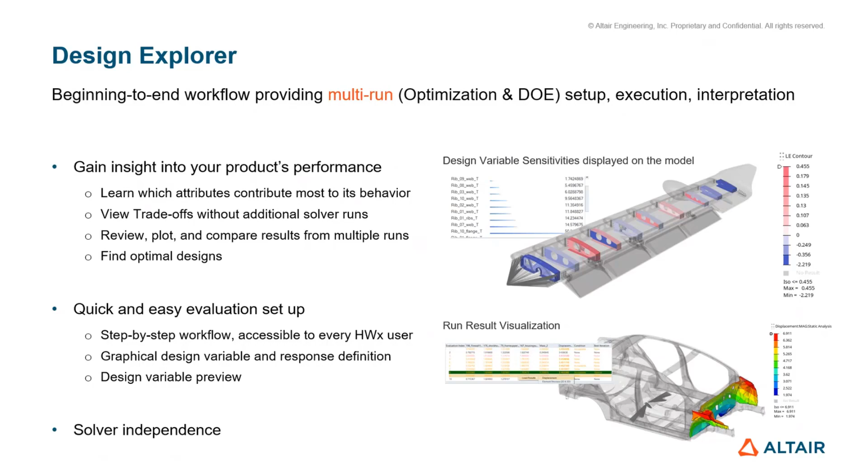So a quick word on explorations before we go into looking at the tools and a demonstration. The Design Explorer provides the ability to perform a couple different types of explorations: optimizations and designs of experiment. Often when people think about exploring or optimizing, they go right to optimization. And optimization is great—it provides an optimal answer to a specific question. For example, what is the lightest design that I can achieve while ensuring that certain criteria are met, like keeping stress less than a certain value or keeping a certain displacement within a range. The Design Explorer certainly can help you set up optimizations and answer these kinds of questions.

And this can be very, very useful. The benefit is we can arrive at these optimal answers, but it is dependent on the type of question that you ask—what are your loads and inputs, and how have you framed the question to receive an optimal answer.

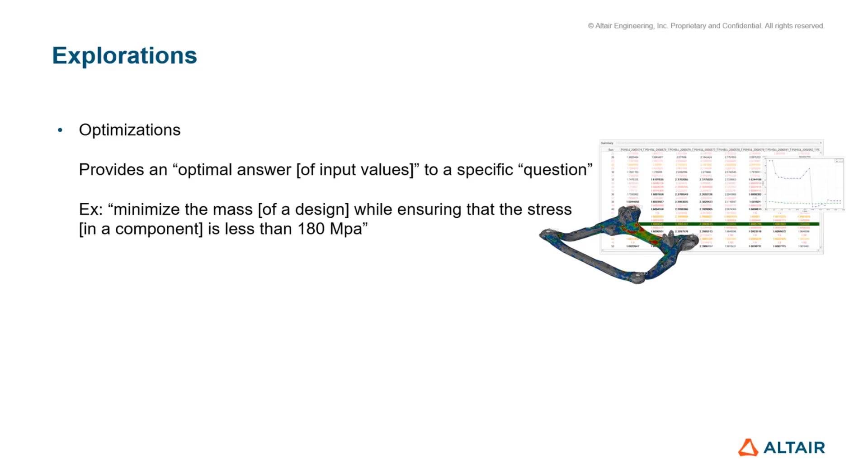Alongside of optimizations, we can also run designs of experiments. This is where we systematically vary the input values of our simulation over a series of runs and evaluate the corresponding responses or output values to these changing inputs. We can gain a lot of additional insights by running a design of experiments, and I'll show that in a demonstration.

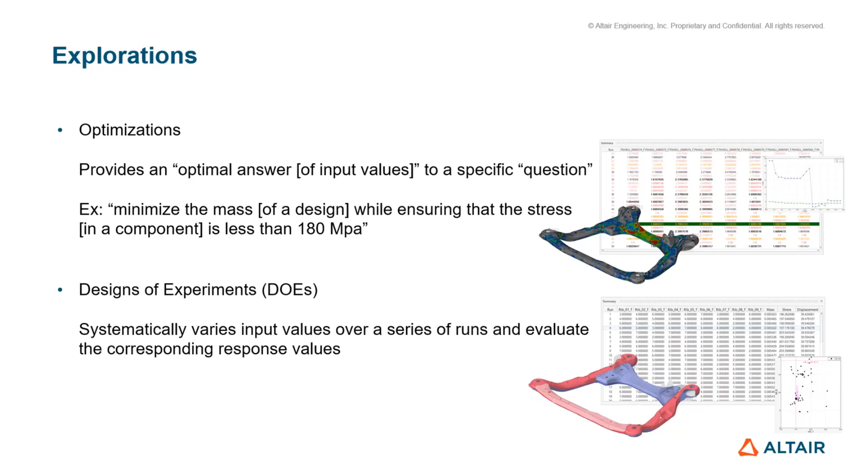So let's take a look at what the Design Explorer looks like. Before I go into a demonstration, I want to give you just a high-level overview because I won't be able to touch on everything in the demonstration, but I want to kind of set the stage here.

So what you're looking at is the latest HyperWorks interface, and across the top is what we call a ribbon, which is where we host various workflows inside of HyperWorks. What you're looking at is the Design Explorer ribbon. Very quickly, I want to show you how it's divided into different areas.

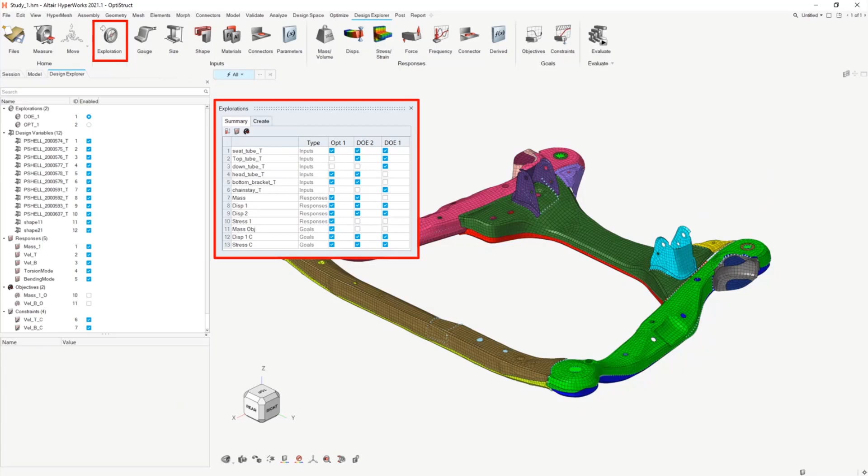First, we have an exploration tool, which is where you will create and manage all of your explorations. You can have any number of explorations within a given HyperWorks session, so any number of DOEs and optimizations. The next set of tools are what we call inputs or design variables, and this is where you define the things within your model that can change over the course of a multi-run simulation—things like part thicknesses, materials, material properties, and so on.

Next, responses and goals. These are the outputs, things that you might want to measure within your explorations, like mass or volume, displacement, stress or strain, forces, frequencies, and other measurables that you want to track throughout your exploration.

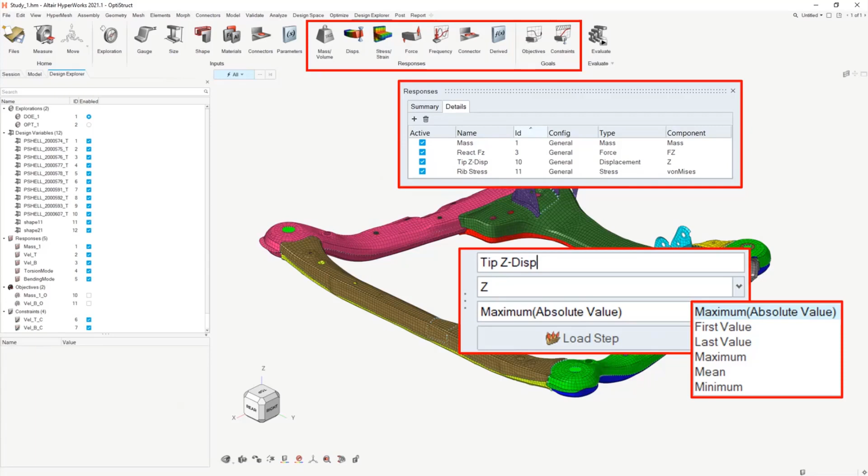And then you may have some goals on top of that. You may have an objective, for example minimize mass, or some constraints like we previously showed, keep your stress less than a certain amount, or a displacement over a certain value. And then the final tool is the evaluate tool.

This is where there's just one button, but there's a lot of things embedded behind this tool. This is where you'll do your submission, and we can automatically submit and monitor all the jobs in your exploration as it's running, so you can see if it's going smoothly, or if there have been issues you can interrogate those.

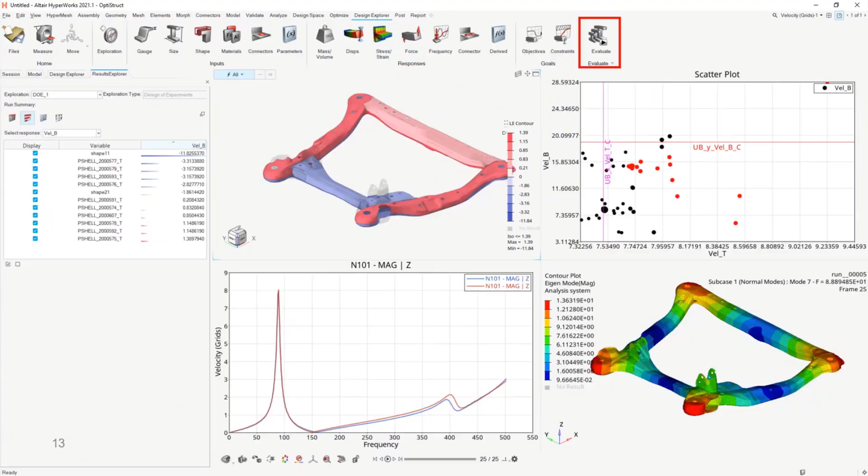So let's dive in and look at a specific example. This is just one example, but the tool is very agnostic to what type of model or domain you're doing. This is an automotive example, but the Design Explorer is domain agnostic - automotive, aero, architectural, and so on.

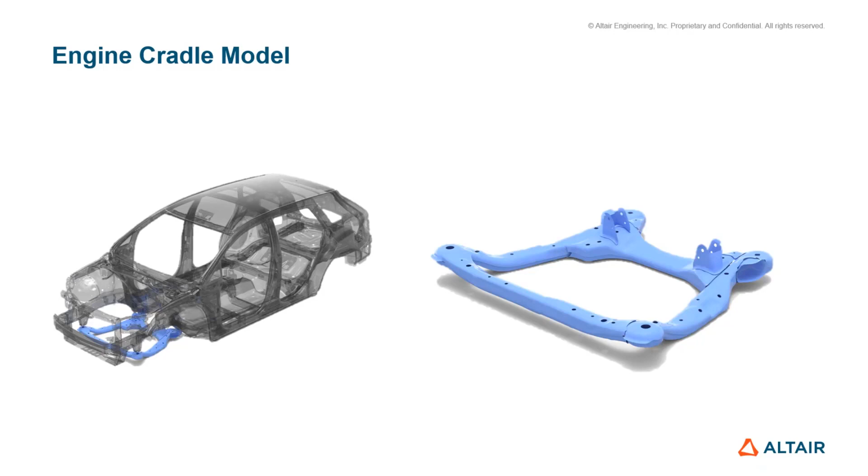In this example, I just want to give a brief description. It's an engine cradle model, an open source public automobile model. The blue part there is the engine cradle, and that's what we're going to be using for this example.

In this example, we've applied some basic dynamic loading to the model, and we've observed a couple different modal frequency peaks, one for a torsion load at about 89 hertz, and similarly a bending mode at about 400 hertz.

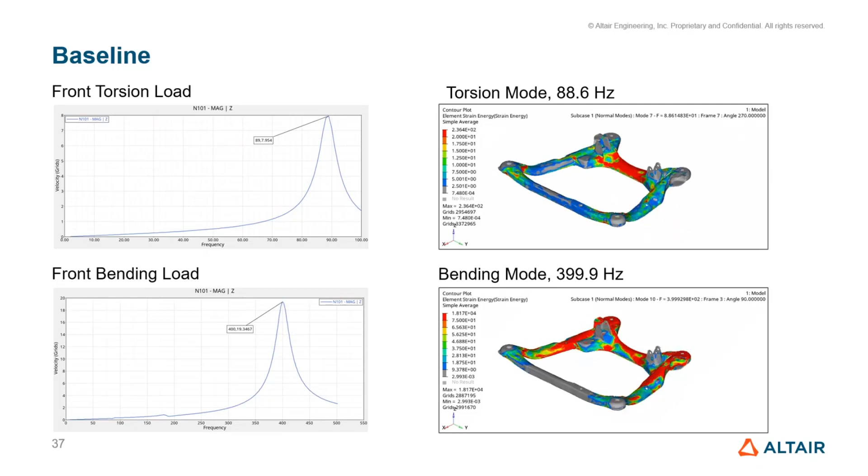So we've set up a problem here where we'd like to explore this design a bit more and learn what parts are contributing to those different modes, how we may modify them, or how we may optimize this design under certain criteria. So we're going to set up a design space as shown here.

In this case we have 12 design variables. 10 are gauge or thickness variables for this part, and then we've defined a couple shape variables, one of which you see animating on the screen.

And then we've identified 5 responses or outputs of interest: the mass of the cradle, and then the velocities and their corresponding modes.

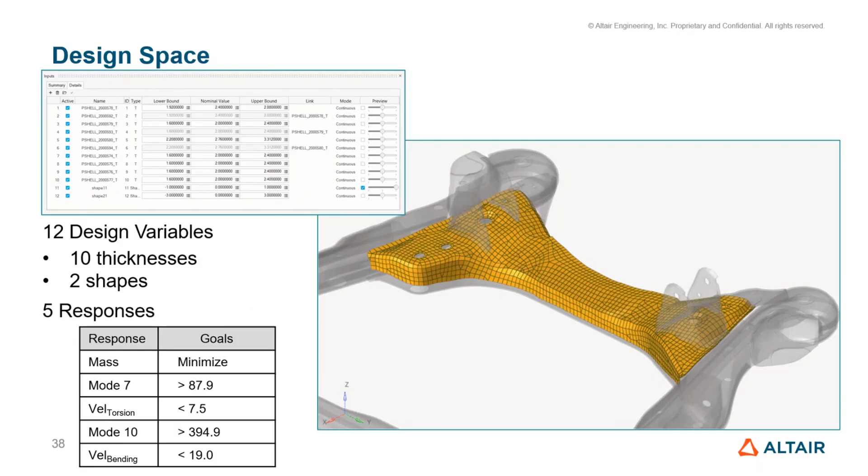So now I want to jump in and demonstrate how I would set up a problem like the one we just described, how you would use Design Explorer to quickly and easily set up the design space, evaluate the design of experiments or optimization, and then interpret and evaluate the results.

So you can see here I've got the model open on the screen. I'm going to click on the Design Explorer menu option and open the ribbon that you just saw previously. The first thing I'm going to do, I'm going to step through left to right and walk through some of these different features and show you how they work, how you would interact with them, and hopefully how intuitive and natural they are to use for a HyperWorks user.

So the first thing I'll do is click on this little compass icon, and we're going to open the Design Explorer browser. This is just where we can see step by step what's going on, what's being created at any given time, what items or entities we're working on, and track what's going on. But we're not going to have to interact with this browser too directly.

As I mentioned, mostly everything that we do, we're going to work right in the graphics area, in the context of the model itself, and that's what I feel makes this workflow very intuitive and natural, and that's true of HyperWorks in general now. So the first thing we'll do is click on the plus icon here, and we'll create our exploration.

As I mentioned, you can create any number of explorations. We're going to just create one DOE to begin with. We're going to give it a name, name our study, and we'll just call it Demo Study. And we'll choose a folder location to store this information in.

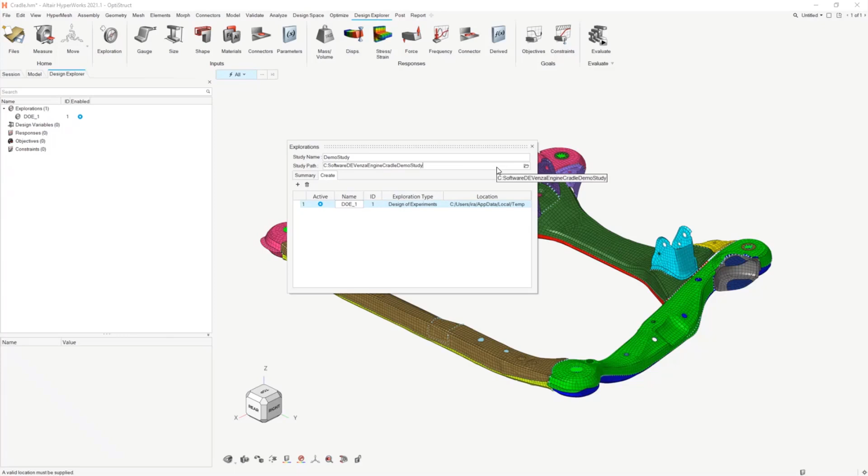I'm just going to paste in a folder location that I previously copied for this demonstration. And we can rename our DOE, or we can accept the default, DOE1.

Okay, now we're going to create our design variables. The first thing I'll do is change my view to isolate my design space. I had previously saved this view with all the parts of interest in this assembly, which are the main parts of the engine cradle.

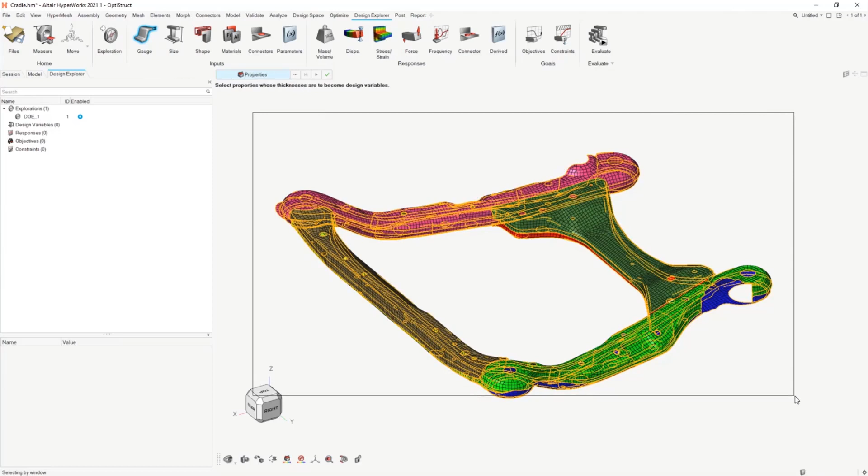I'll click on Gauge, where I'll define my thickness variables. A guide bar prompts me to select properties whose thicknesses or gauges I want used as design variables. The easiest way is to drag a window across the screen and select all 10 of the components currently displayed, then just click Create to generate the 10 design variables.

Before I do that, let me briefly describe what's going on, since there are different ways to define these variables. Whenever we define a design variable, it has a nominal or baseline value, simply read off the baseline model as it exists here.

Then I need to tell the Design Explorer how this value can vary over the course of an exploration—in other words, a lower bound and upper bound, or minimum and maximum value. By default, it creates that lower and upper bound as plus or minus 10% of the nominal value.

If I click Create again, it creates all those for me. I can change these values to plus or minus 20% if I want. I also have different ways of defining these variables: as a percentage like I'm doing, by setting specific values for the lower and upper bounds, or even by setting discrete values—for example, if each part can only be made from a blank of fixed values, I can enter those as discrete values in a table.

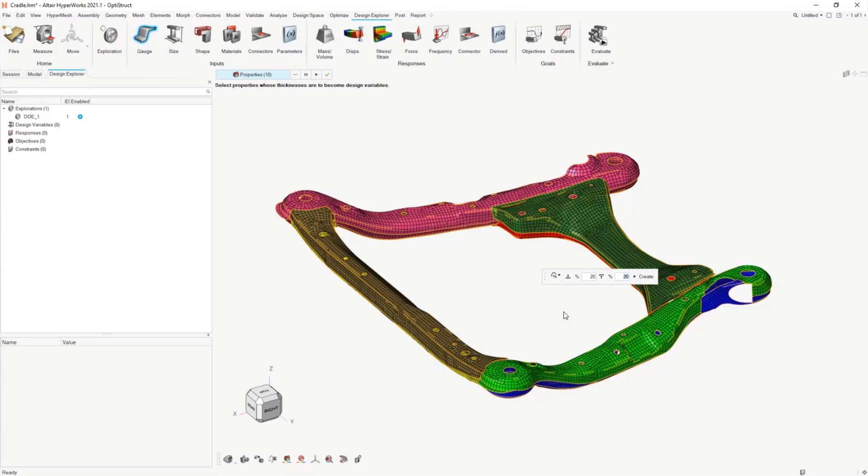In this case, I'm just going to change it to 20% and click Create. With just a couple of clicks, I've got 10 design variables created now.

In the example I mentioned, we had a couple of shape variables. We had previously used the HyperMesh morphing tools to create shapes within the model, and we can define those as design variables as well.

I can pick those graphically—they're not turned on at the moment. If I turn those on, I can pick them graphically just like the thicknesses, or click on this advanced selection dialog and choose the two shapes in the model, then click OK. Now you can see I've got two shape variables created.

So that defines the 12 design variables I mentioned. We can click on any of these review dialogs and see a couple things: a summary panel showing our DOE and all the variables used in it, or we can click on Details to see details of the design variables themselves.

So I can see each of the variables, the thickness and shape variables, at the bottom, along with their nominal value, lower and upper bound, and we can modify these as needed. There are also some preview tools here that I won't show in the interest of time, but you can check on any of these.

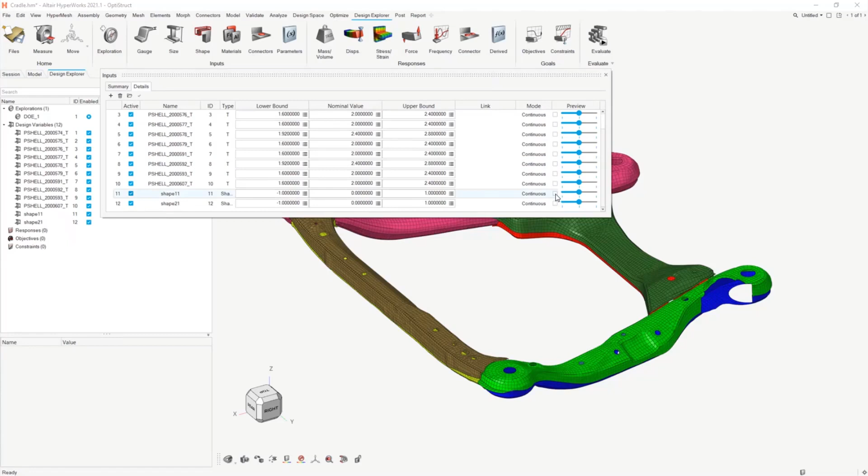For example, the shape variable—you can animate to see a preview of the shape and its lower and upper bounds. Okay, so the next step is, we've defined all our design variables.

Let's define our responses. I'll turn back on the entire model so I can make the selections I need to make. Our responses, you recall, are here in the next portion of the panel.

The response we're interested in, in this case, is a mass response. So we'll click on the mass tool, then click play or apply, and you can see a mass response is created. That's really all I have to do.

After creating the mass response, I want to create my velocity responses as described in the slides. I'll click on the displacement tool here, which has all my nodal type responses, then in the guide bar choose velocity. Again, the guide bar prompts me for what it's asking, so it should all be very intuitive and graphics driven.

It's prompting me to select the node or nodes where I want to extract this velocity. We'll go ahead and select one node here, which is the point of interest, and now I get this micro dialog.

Similar to creating the design variables, this is for capturing additional contextual information to the type of response that I'm creating. I can choose which load step I want to extract it from. There's some additional information if I pull down on the chevron here, but what I'm going to do is open this post entity editor where I can see all the attributes.

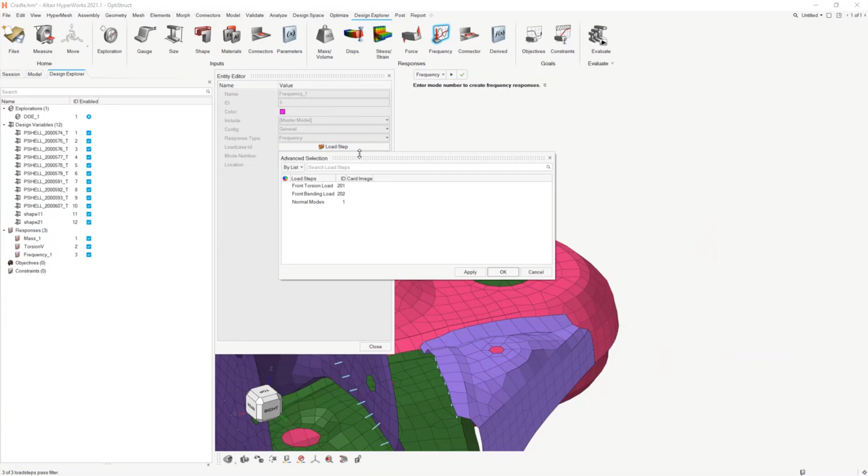I can create a corresponding frequency response because I'm interested in tracking the mode associated with that velocity. So I click on frequency, then click on play here, and in its micro dialog, very similarly, I can select which load step to use to track this mode. In this case, there's a normal mode step, and I'm interested in tracking the seventh mode. So I've created this frequency, and maybe I'll rename that as torsion.

So I can continue on this process, defining additional responses. In this case, we also had a velocity response as well as a modal response for a bending mode. Those will be created in much the same way.

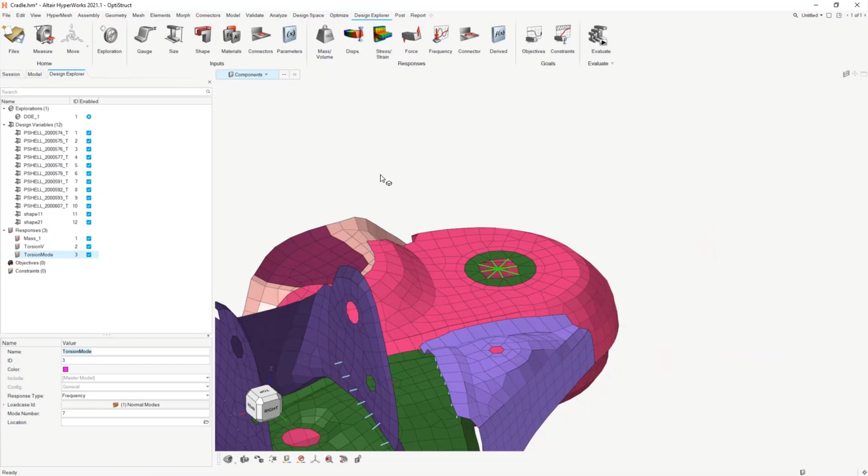Next, if I have any objectives or goals for my simulation or exploration, I can define those here. I'll just show quickly how to, this is a design of experiments so it wouldn't necessarily have an objective, but I may choose to run an optimization later. So I can create an objective where I simply pick a response like the mass, then select the type of objective. In this case, I want to minimize the mass, so we'll leave that as it is.

Constraints are defined in much the same way. For example, I think our baseline torsion velocity was around 89 or 90 hertz. So let's say I want to take that torsion velocity and constrain it to be no lower than its baseline value, which was 89 hertz, I believe. So now I've got an objective and one constraint.

I can continue to build this up similarly for the bending mode as well. So once I have my exploration, in this case my design of experiments, defined, I would go and use the evaluation tool here to go ahead and evaluate this design of experiments.

The evaluate dialog appears and gives me some options in terms of the DOE type I want to run, the number of runs I want to use, if I want to run more than one job in parallel, and so on. The optimize button here is checked by default because I do have an objective. If I leave this checked, once I run my design of experiments, it will try to optimize based on that DOE's response surface. I can turn that off if I just want to run a design of experiments.

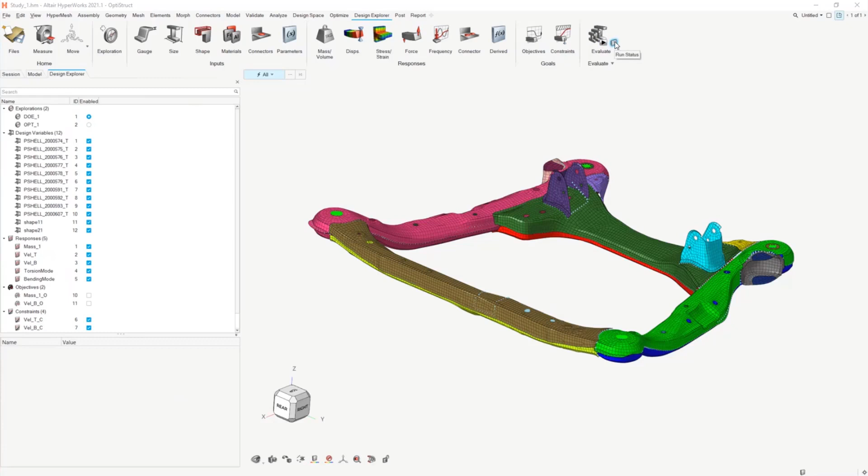And I evaluated this DOE. We can see on this run status dialog the runs that had previously been done for this DOE. In this case, it was a 73 run design of experiments, and we can see all the runs completed successfully. So once that's done, I'm going to go ahead and open the Results Explorer.

As I mentioned previously but didn't show in detail, the Results Explorer contains this browser with all of the tools and reports that can be used to interpret and post-process an exploration like this one. Let me go through and describe the different tools available for interpreting the results of a design of experiments like this.

Across the top here there are 4 buttons: run summary, linear effects, trade-off, and scatter plot. These are available for all designs of experiments. Let me go through and show how these might look and work.

We have a summary table, which is what's displayed here. In this table you can see one row for each run, corresponding to the 73 runs in this DOE. Each of the columns shows the inputs or design variables, all my thicknesses and shape variables, and then the corresponding response values for each run: mass, the 2 velocities, and the modes we were tracking.

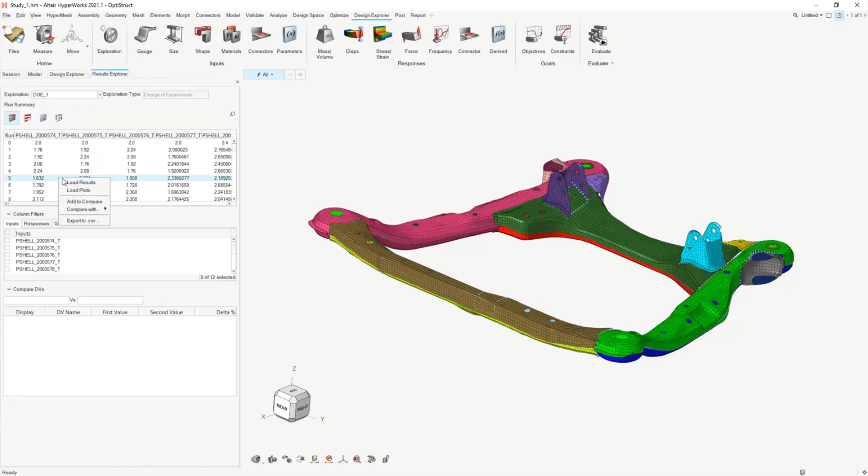I can view all the results in a tabular form. We can also load results directly from here. So for any run of interest, maybe run 5, let's load results. When I click load results, you can see the results are loaded into a separate window here within HyperWorks, and now I have full control of the post-processing client. I can switch to that.

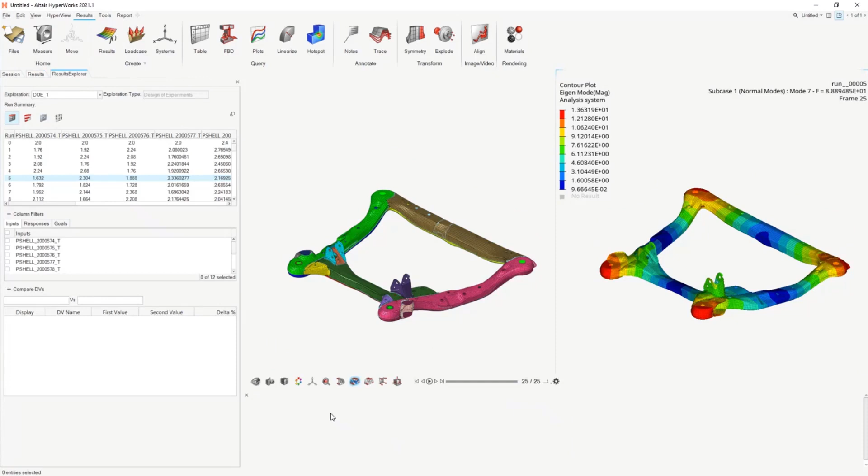Let's say mode 7 was my torsion mode of interest. We can switch to that mode. We can come down here, for example, and change — maybe we want to look at the strain energies. Let's apply that. And then maybe we want to look at the animation of that mode for the fifth run. So we can do that.

We can continue to build up a dashboard if we like. I can change the layout here to maybe a 2x2 window situation. Maybe in the lower right-hand one I want to load results for, maybe compare run 5 to my baseline run. So I can select the lower right window, and we can look at the 7th mode. We can animate these side by side to compare them and do an interrogation that way.

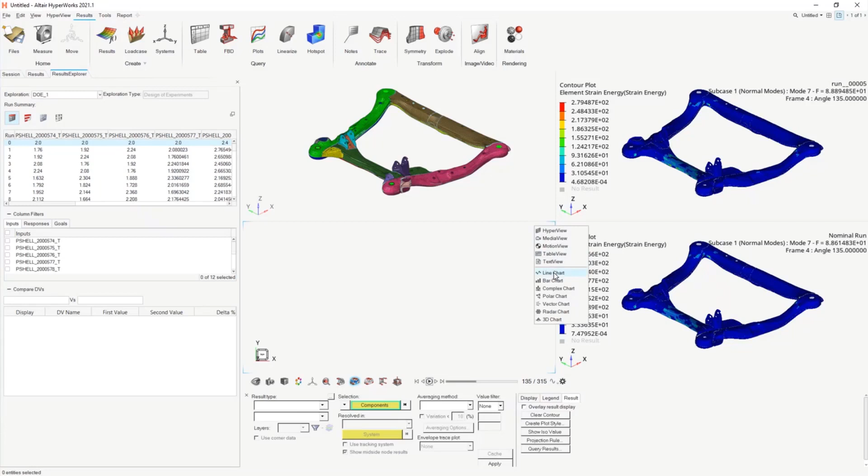Additional tools from this summary table — we can also load plots. If I change this client to a plotting client, maybe for those same runs, the baseline nominal run and run 5, I want to load and look at the velocity peak for this load case. So I can select load plots, get the create curves window, and maybe look at the vertical magnitude for the torsion load case and see where that peak is that I was interested in.

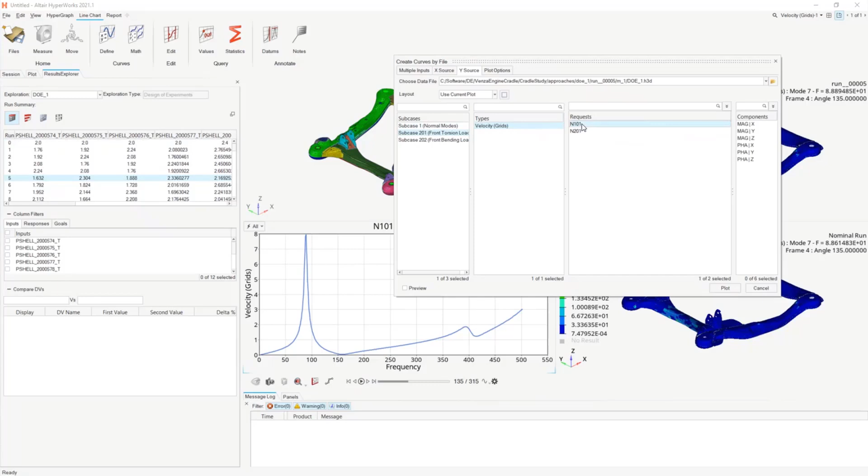So there's the nominal run. I can select load plots for run 5 and just overlay the peak onto the same plot there. So I can continue to build up this dashboard using the loading information from any of the runs. For the DOE, I can overlay these runs.

I do have an optimization here as well. It might be interesting to do the same kind of post-processing, comparing the nominal run to an optimal run, for example, instead of just 2 of these DOE runs. But the concept would be quite the same.

Let's look at the next couple of tools though — the linear effects, here in the upper left corner. Let's switch to a response, maybe that same torsion response. What this is giving us a look at is the linear effects, or the sensitivities, of each of the design variables to a particular response.

So I've chosen that torsion velocity, and now I can see a ranked listing of each of my design variables for this response. I can select these individually and see which one it corresponds to in the model. This is telling me the sensitivity of this design variable on this response. In other words, if I want to affect the torsion velocity, an increase in this given thickness here will have the greatest impact relative to the others beneath it.

So it's giving me an indication, some insight into my design, and an indication of which design variables I should interrogate or investigate if I want to affect a given response value. These are in relative terms, so it's indicating that this thickness has a relatively greater impact than the ones beneath it.

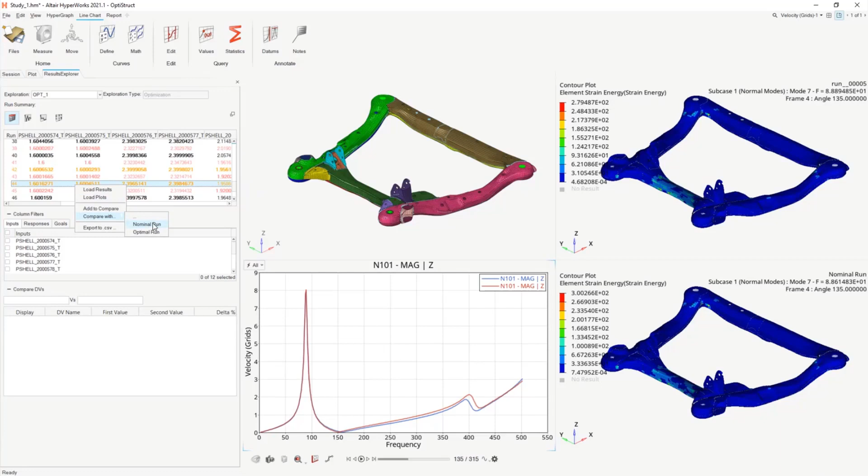So as I mentioned, you may want to load results and compare an optimal run with a baseline run. Or we have a new tool here called Compare Design Variables. If I click on a given run and say compare with, in this case let's compare the optimal run with the nominal run, then I get a different contour up here in the left-hand window.

Let me sort these. This is showing me the change in design variables between the two runs I've selected—in this case, between the nominal run and run 44, which is my optimal run. So it's a good indication of how the variables have changed. We can see these have decreased by 18, 19, almost 20%.

And some of these variables have increased in value. So it's an indication that in my optimal run, in some places mass has been reduced, and in other places mass has been increased, but still arriving at the optimal run. So this can be a handy tool for comparison.

Within the optimization results explorer, we have some additional plots here for plotting the iteration history. Let me just plot down here. For example, we can plot our objective, which was the mass, and see how it's changed over the course of the optimization and how it's been reduced from its baseline value. It did go up while the optimizer was searching, but ultimately has been reduced as per our goal.

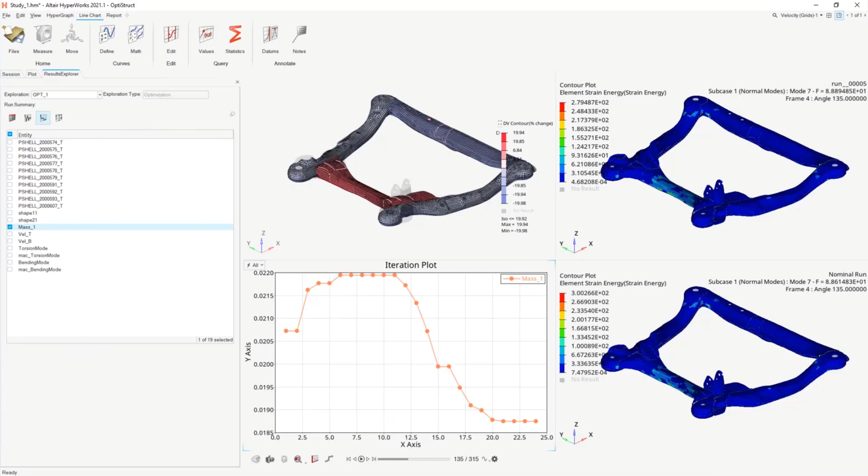So that's some of the additional tools that are available. I think that's what I wanted to show for a quick demonstration. Let me come back here and just wrap up.

In quick summary, we had a look at the Design Explorer. Design Exploration, I feel, is an underutilized but very powerful set of tools for CAE users. As we've noted, you can gain a lot of insights into your design by performing these designs of experiments or optimizations, and these tools are often not available. We've tried very hard to integrate Design Explorer directly within the HyperWorks environment, so it's available to any user of HyperWorks right out of the box, providing a beginning to end workflow.